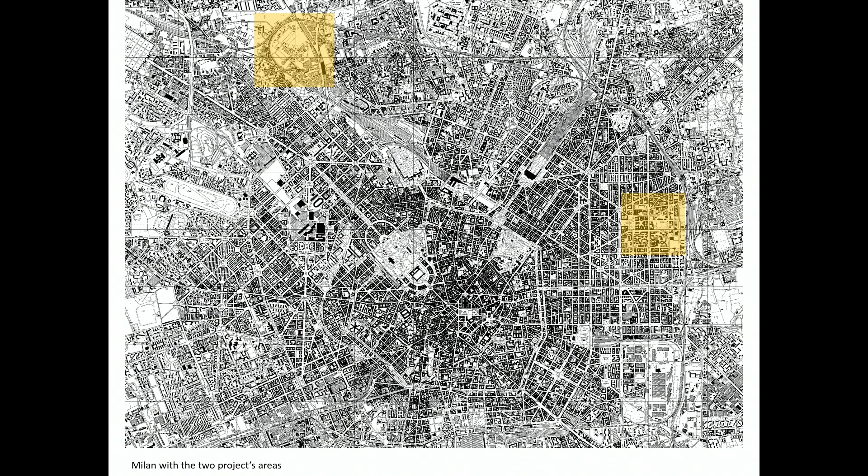The two projects propose similar themes and suggest similar aims in very different urban conditions within the city of Milan. In both cases, the fundamental undertaking of the project is to define the compositional principle for the sites, or the principle of order, to be implemented through the composition of buildings and services for the universities and the city, considering the relationship with the context, the differences in character and history of the areas, and the intended destinations.

We developed the master plans for the sites, and only then the design of the individual buildings following the indications of the master plan. The groups of students tried out different alternatives for the individual work of architecture to verify their suitability in their master thesis.

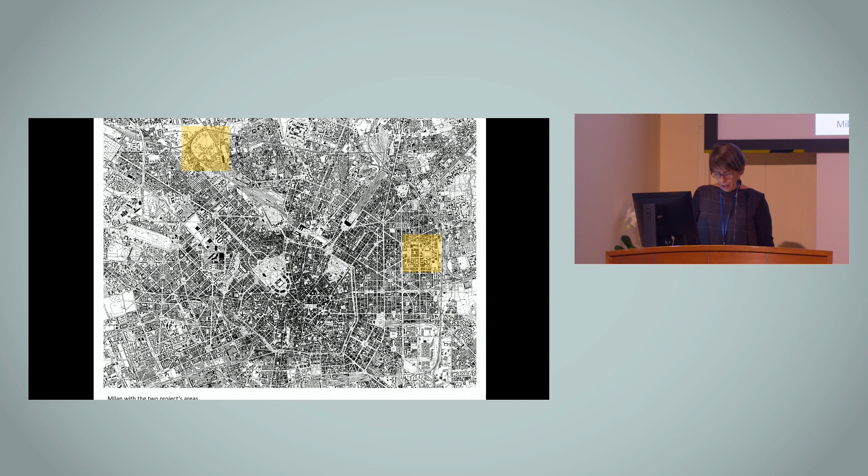The area in Bovisa district is an industrial site known as the Drop, because of the shape of the tracks that fence it in. This area had already been identified more than 30 years ago as the site for a possible expansion of the Politecnico by a group of its professors.

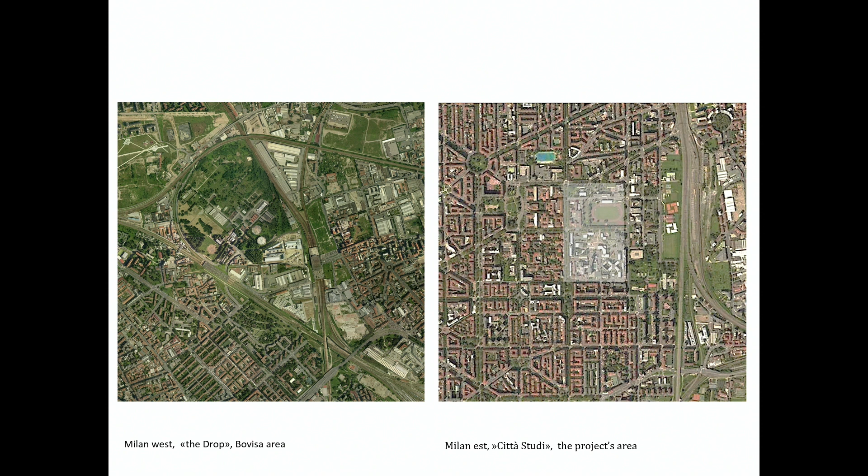The choice was based on an idea of the city that considered the establishment of public institutions on a territorial scale a necessary condition to bring an urban quality and new identity to these suburban areas cut off from the life of the city, as Bovisa then was. The proposal was reinforced by a decisive condition for a university. This area was served by two railway lines with two distinct stations, in turn well connected to the metropolitan transport system, which would be further expanded.

The Polytechnic site would therefore constitute the new urban pole of a polycentric city, a city no more based on a dominant center where institutions and places of value were concentrated, with an extensive surrounding, substantially residential suburbs. The new settlement represented an opportunity to offer new places and new collective buildings in this part of the city that was historically devoid of them.

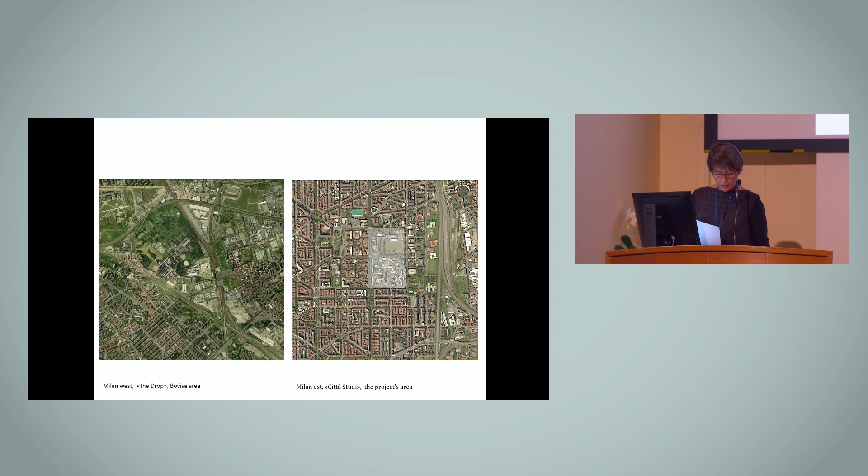An initial project for the Polytechnic site, in which I participated as a PhD student at the time, was developed by the Department of Architectural Design and Urban Planning on behalf of the municipality and was coordinated by Antonio Monestiroli. After multiple vagaries, including serious problems of soil contamination, a competition, and an unfulfilled assignment, the municipality partially reclaimed the area and reinserted it within the territorial government plans, redefining the site's destination and perimeter.

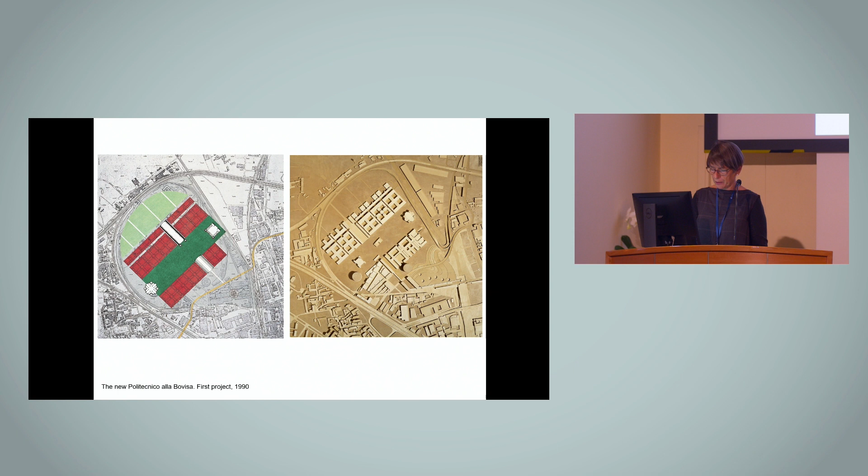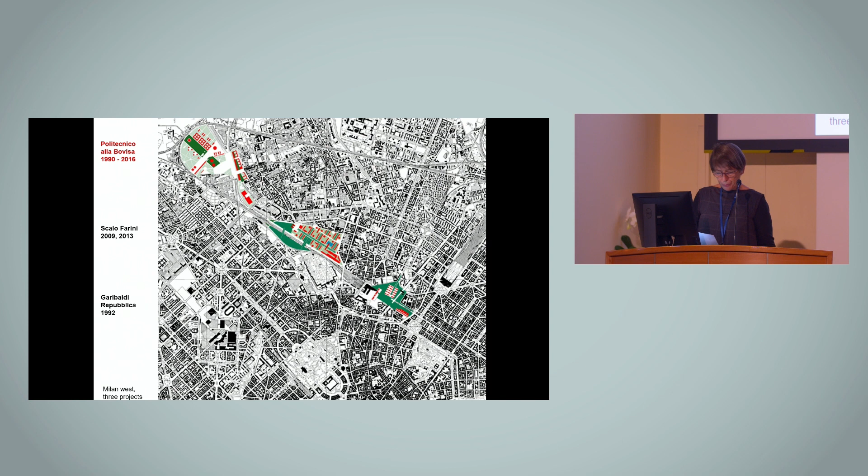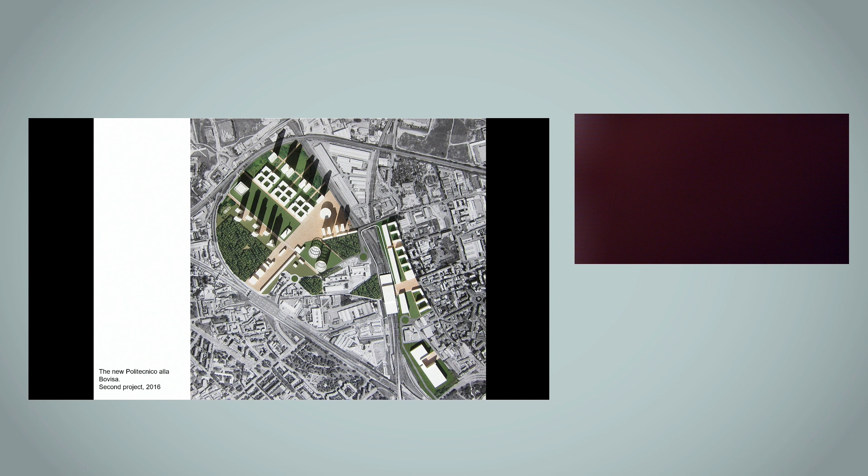The principle of order underlying the project did not differ much in its general line from the original one, albeit in different forms, while taking into account the changed conditions of the site. It hypothesized the presence of a large central collective place, a park, open to the city, overlooked by departments, research laboratories, classrooms, and residences, both for the university and outsiders.

On one side, the park is bordered by the surviving gasometers, a memory of the site's industrial past, repurposed as performance venues. On the other side, by the Central Public Library, a remarkable building for this study place.

Perpendicular to the park, a second public place will connect the new site with the two railway stations and the districts outside the drop. This is a plaza featuring commercial, cultural, and sports facilities, as well as a multi-hall auditorium and other buildings for research and work.

The two railway stations guarantee accessibility and connection with other parts of the city, and with a new mixed residential district, also a subject of this new plan. Car accessibility is guaranteed but will be restricted, excluding the possibility of crossing the new sites.

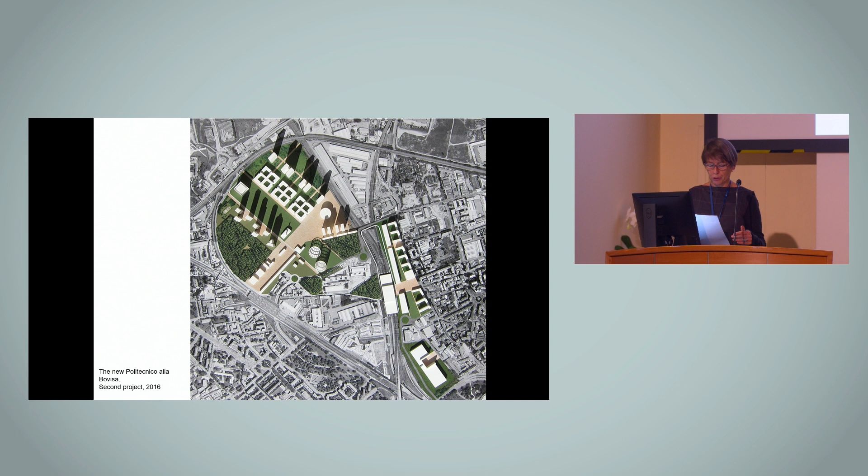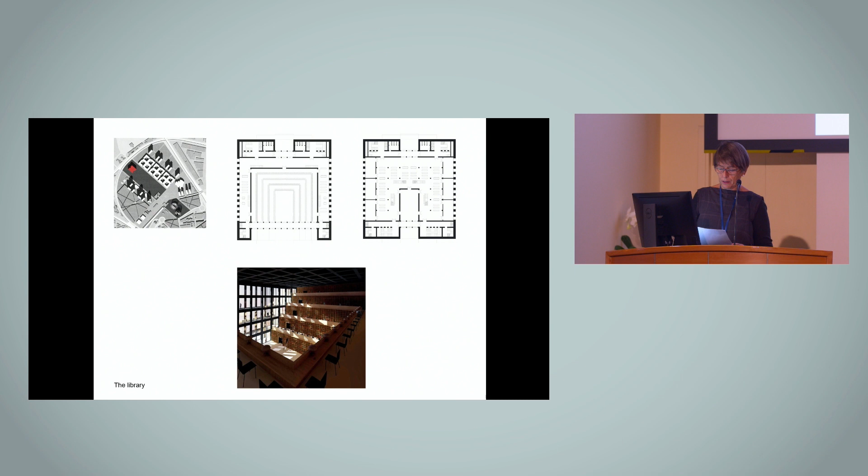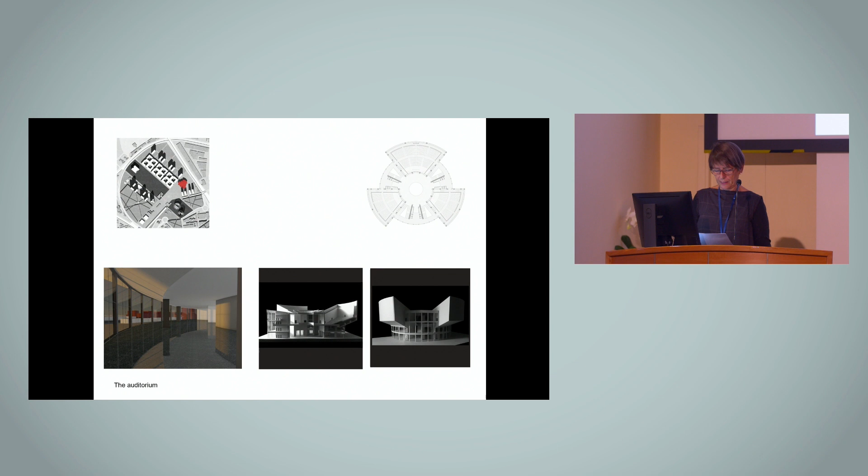The degree thesis of the students then developed several architectural projects following the indication of a master plan. I'm showing you without any other comment. They are fundamentally a master thesis of the students.

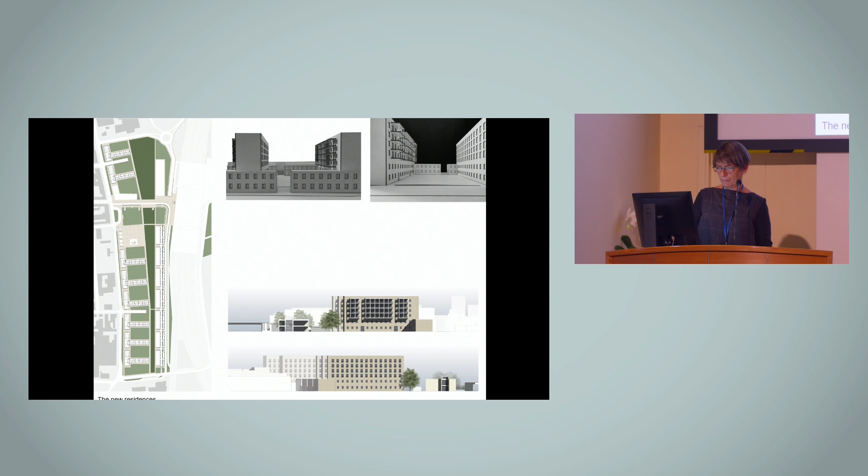In the Città Studi area, the planned transfer of the two hospitals to Sesto San Giovanni and of some departments of the State University to the former Expo area makes it possible to rearrange the entire district, which has expanded over time, in order to offer new services and to bring a new definition to the collective places of the two institutes living side by side, the Politecnico and the State University, as well as to the city.

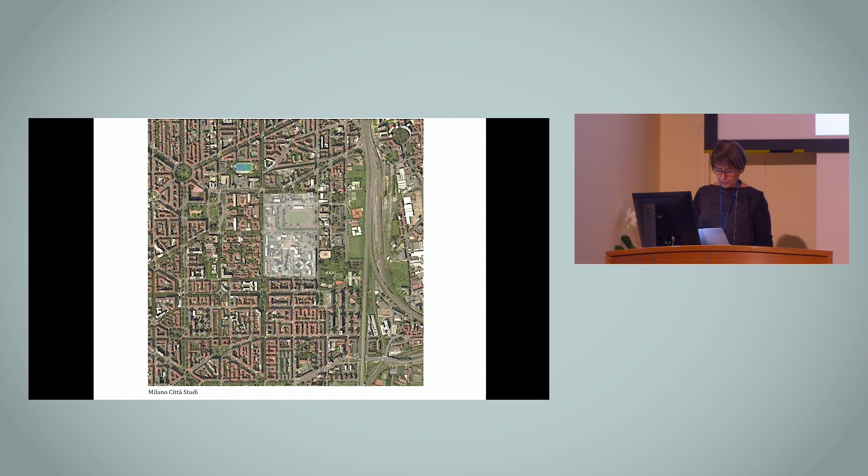As the name itself suggests, Città Studi, that means the city of the studies, grew rapidly around the site of the first Polytechnic and the scientific departments of the State University from the 1920s, in the wake of the 19th century plans that foresaw the city ordered by blocks. Over the years, the built fabric became welded to the ancient village of Lambrate toward the east, and its industrial settlement limited by the railway embankment and the Lambro River.

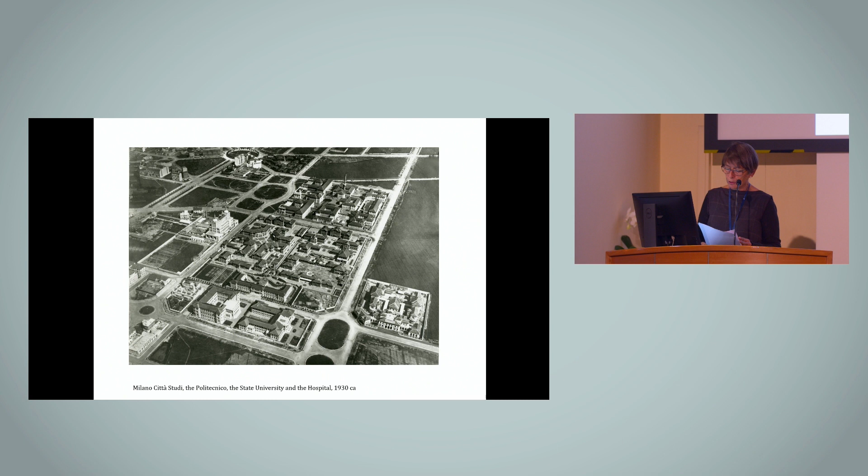Surrounded by their enclosures, the buildings of the two university poles and the hospitals have grown on themselves, besieged by a city that has expanded around them, occupying all the available land and preventing any further development.

Thanks to the transfer, which will free up large areas between the buildings of the university, the theme is now to design a system of open spaces whose task is to establish clearer new relationships between the parts through the arrangement of some urban public places, squares, parks and gardens, along with the construction of some university facilities, a library, an auditorium, an enhancing of the existing sports facilities and provision of residencies and services for students, of which Milan has a great need.

A study of the road network has allowed us to hypothesize the pedestrianization of Via Celoria, this is the green axis, an axis straddling the two enclosures of the old Polytechnic and the Department of the State University, to become a tree-lined avenue, a kind of rambla, for meetings and relaxation that would represent a continuation of the park of Piazza Leonardo da Vinci on the west side, which is already a meeting place for the students, extending as far as another open green space defined by the presence of the new library and the piazza of the new auditoriums.

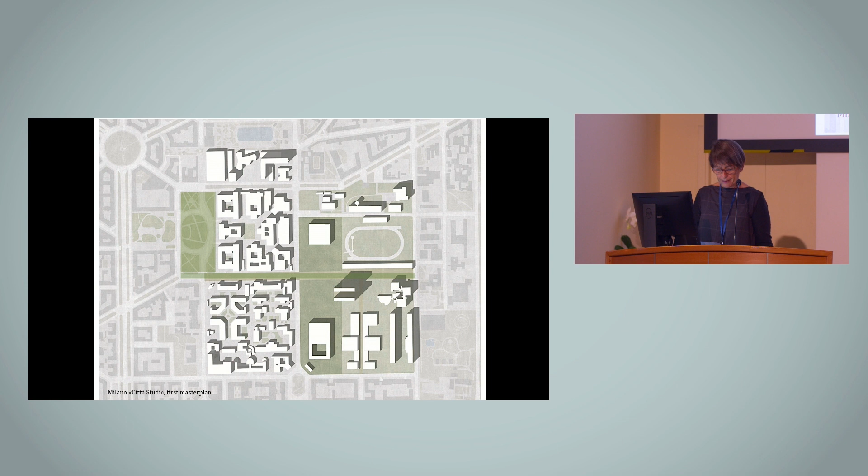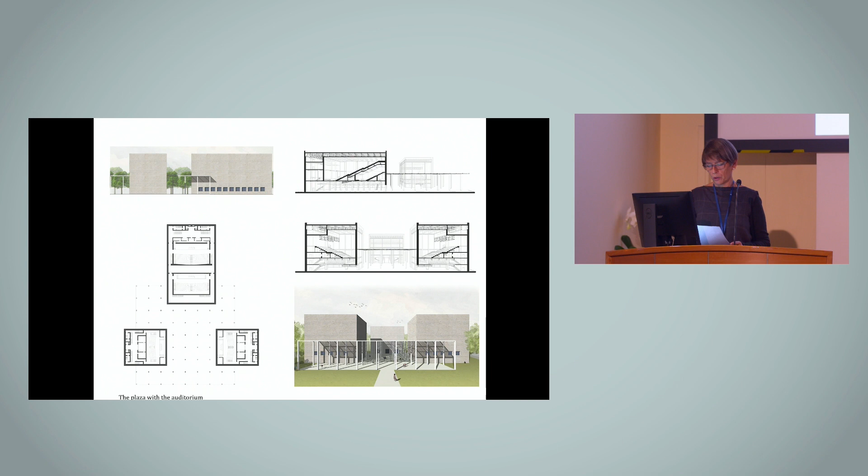In the same way, the master plan was developed with a group of students who, in their master thesis, designed the individual works of architecture that could give form to this scheme.